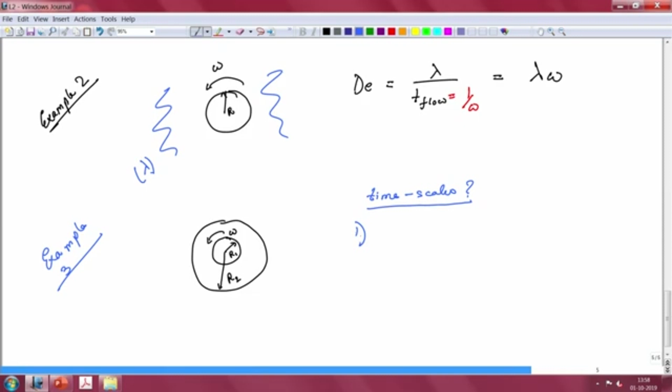At least one time scale you can borrow from the previous problem. So time scale 1 can still be given by 1 by omega. But you can also form another time scale, which is essentially a shear rate or the inverse of a shear rate. This new time scale is another way to define a Deborah number, or in this case, when people use the second one, it essentially becomes a Weissenberg number.

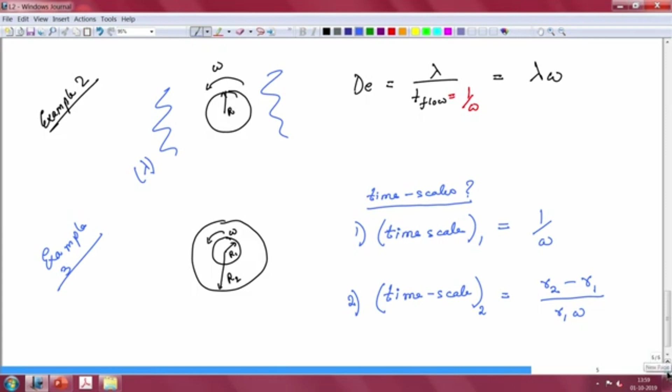With that, we are done with our examples on, or our introduction to, time scales and the Deborah number, which are two very important concepts with regards to soft materials or viscoelasticity.

Now what we will do is go back to the initial discussion from one of the lectures: what is viscoelasticity? We had said that viscoelasticity is the property of materials which involves aspects of two types of common natural responses: classical elasticity and classical fluid, or the classical elastic solid and the classical viscous fluid. This definition was taken from one of the recommended textbooks for this class.

Obviously, the next step before we try to understand viscoelasticity should be to try and understand what a classical elastic solid is and what a classical viscous fluid is. That should be the obvious next step.

Another thing we are going to do here, as discussed in a previous lecture, is follow a continuum approach to understanding viscoelasticity, where we do not necessarily depend upon the molecular constitution of the material. We are going to define macroscopic tests where information on molecular aspects is not necessary. Obviously, if you have that insight, it gives a better understanding of the material response, but even without it, you can still define macroscopic tests to help understand the material.

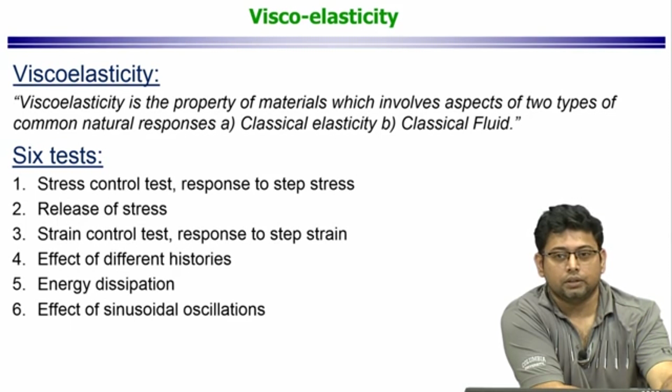When we say effect of different histories, it implies the effect of different histories of one of the imposed variables. Then, energy dissipation in the material, and sixth, the effect of sinusoidal oscillations. These are the 6 tests as per the book Mechanical Response of Polymers by Wineman and Rajagopal. We will start a new page here.

Now we want to discuss macroscopic tests.

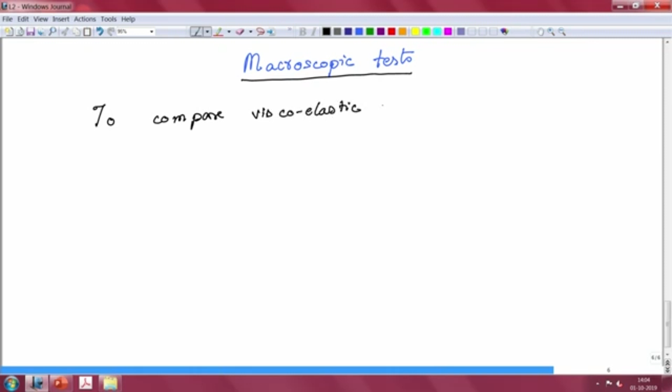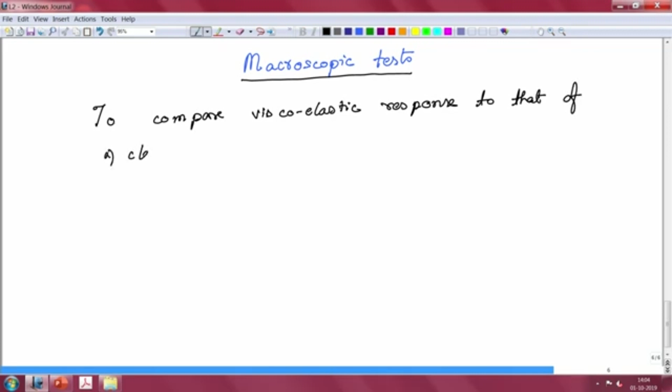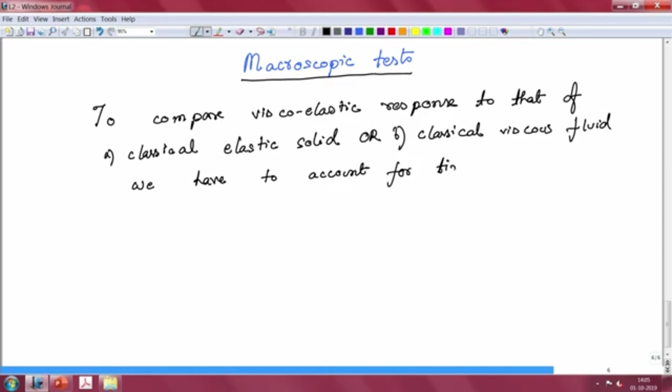But before we get into it, we have understood that to compare the viscoelastic response to that of a classical elastic solid, or B, the classical viscous fluid, we have to account for time as an explicit variable.

So what do we mean by that? We mean that the relationship between stress and strain, when it comes to a classical elastic solid or a classical viscous fluid, typically the constitutive relationship does not account for time explicitly, it is already there, and we will see.

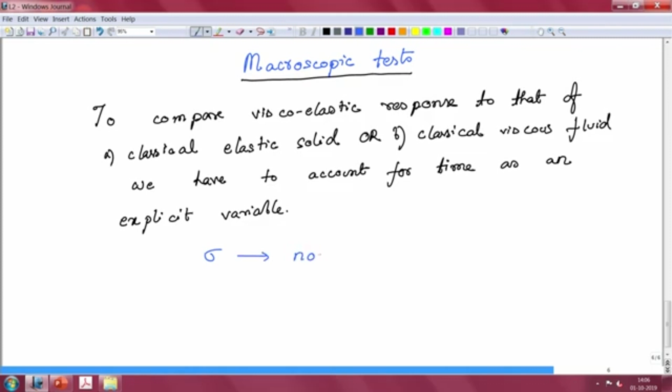So, to get there, let us quickly introduce a couple of variables that we will be using quite a bit. Let us introduce sigma, which we will use for normal or shear stress, and epsilon, which is again going to be a normal or shear strain.

We are going to assume you have some understanding of stress and strain, but I will note that stress and strain are tensors and have to be very rigorously defined in many cases. We are not going to do that right now. We will take a very simple undergraduate understanding of stress and strain, as you might have seen in undergraduate classes.

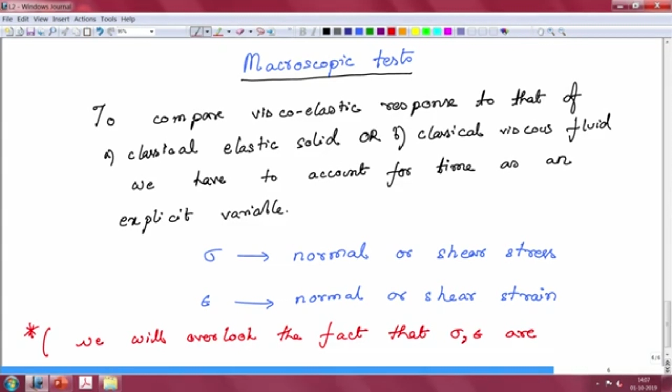So we will overlook the fact that sigma and epsilon are tensors and have to be rigorously defined. We are doing this because we currently do not require tensorial notation so much, and we are just trying to get some initial intuitive understanding. We will treat it almost like a scalar quantity. We will come back in a later lecture and introduce stress and strain as tensors when we discuss constitutive equations more formally.

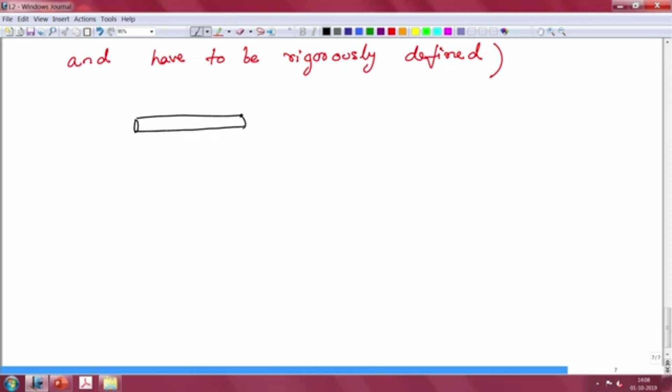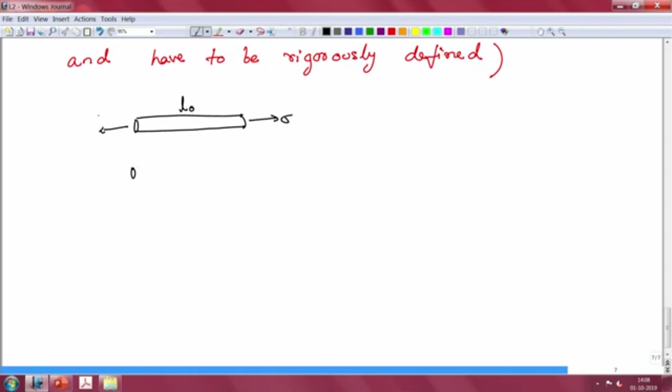Also, what do we mean by strain? Here we go by some early intuitive ideas about what strain is. For example, if you have a rod of length L naught, and you apply a normal stress, the rod increases in length and becomes L naught times 1 plus epsilon as a response. We will stick to this definition, which only works for very small strains. For large strains there are other ways of defining strain, but for most of this course we won't require that, so we confine our attention to this simplistic understanding.

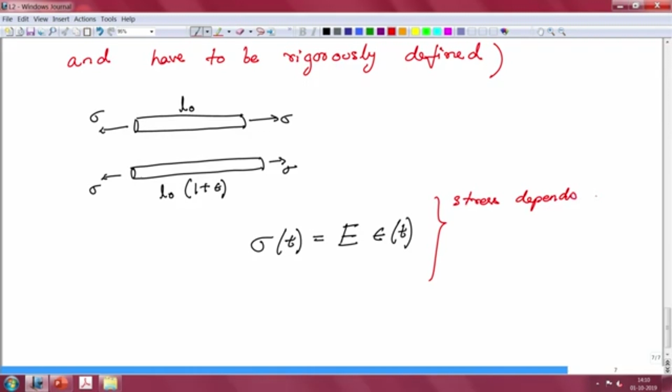Now, I said a few moments ago that we have to account for time explicitly. What do we mean by that? When it comes to a solid material, you're already familiar with a famous rule, where E is a modulus quantity. Here, what we do is relate strain and stress, or vice versa. So we can say that stress depends only on instantaneous strain, and vice versa.

When we write this, we are already assuming that history effects are not important, because the stress at any given point in time depends exactly on the strain at that time, not a value of strain in the past, and vice versa is also true.

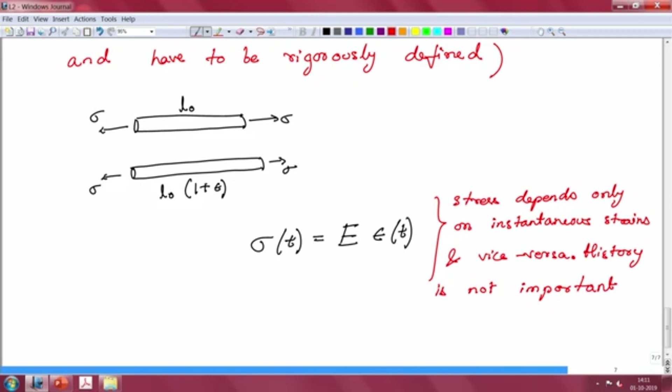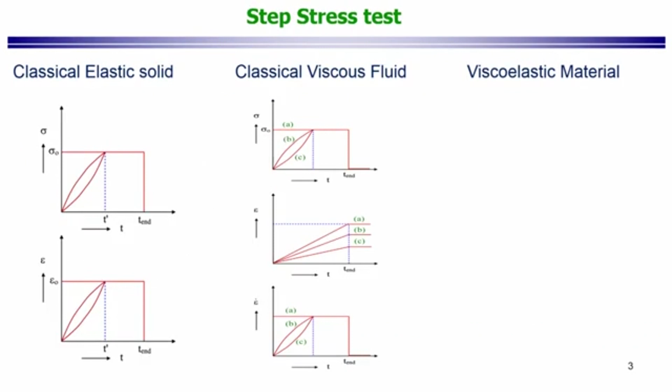Now that we've discussed this, let's move on. We are going to break this idea and start introducing time more explicitly. To do that, let's go back and quickly refer to the 6 tests we had discussed. Let's keep to the first test: the stress control test, or the response to step stress and the release of stress. What do these things mean?

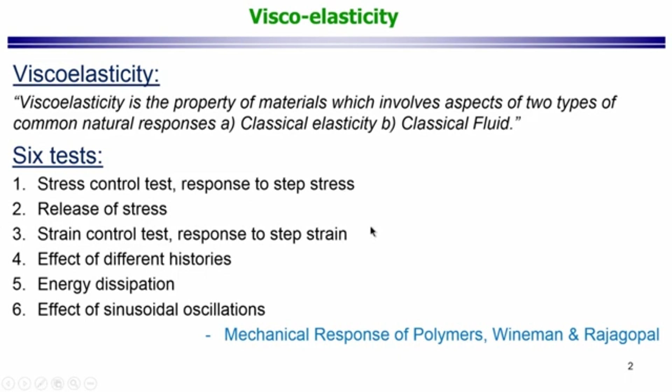Let's discuss the first one, the stress control test, using this image. In this test, we apply a known amount of stress, let's say sigma naught, and measure strain as the material's response. The first diagram is the input, and the second diagram below is the output. This curve is your stress control test—step stress. You provide a known value of stress to the system, and then measure what the output is.

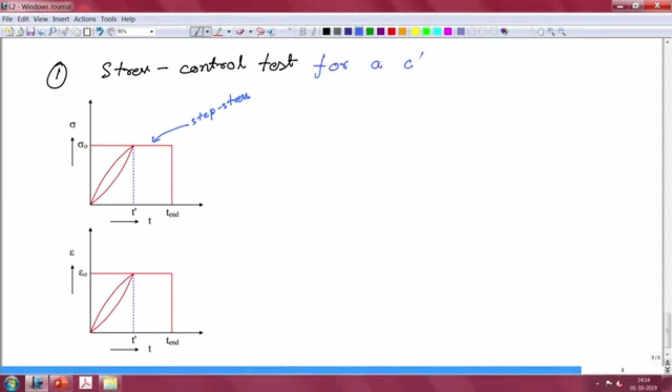What we see for a classical elastic solid - for the next few moments our discussion will be for a classical elastic solid. So, this diagram tells you what happens when you apply a stepped stress to your system.

What you get for a classical elastic solid is that the moment you apply a stress of sigma naught, your system will instantaneously register a strain of epsilon naught, and this strain holds for as long as you keep your stress to that value.

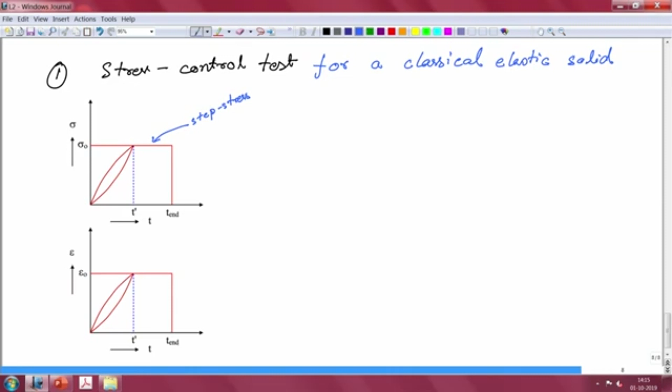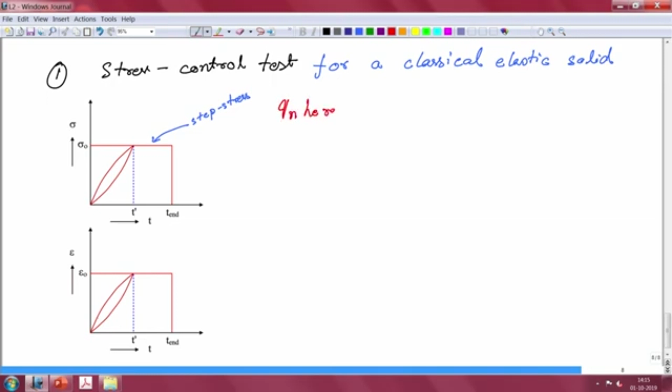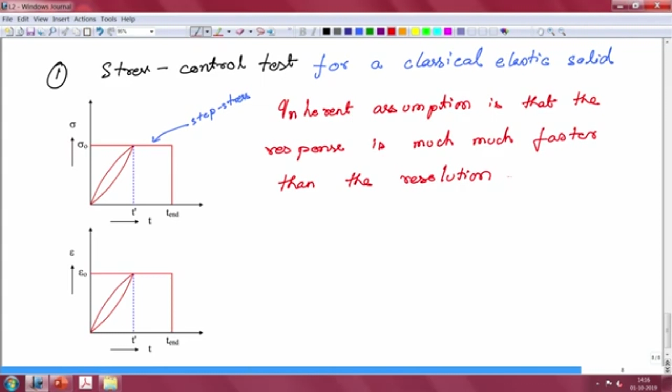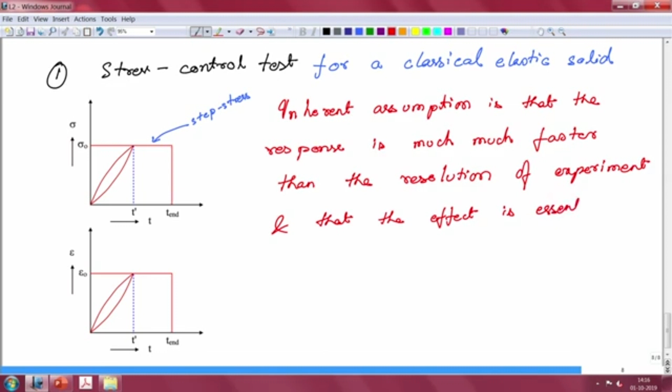So here the inherent assumption is that the response is much faster than the resolution of the experiment, and that the effect is essentially instantaneous.

So here when you apply the stress in the step test, your system immediately registers an epsilon naught, and this immediate response is really immediate in the sense that the experimental resolution is much bigger than the response time. Any material would take some amount of time, but in the case of classical elastic solids, they are so small that a typical experiment would not register them.

What you end up seeing is essentially an instantaneous response. For the time that we discuss continuum mechanics problems, we will treat this response as really instantaneous. When we look at the molecular nature later, we will see why this response is very fast, and get some idea of how fast it really is, because it cannot be infinitely zero - it has to be a finite number. We will come back to that, but for now we will just consider this as instantaneous.

Now, this is the first test, and what it says is it just continues for as long as you keep it - as long as you hold the stress at that value, the strain will also be held at that particular value.

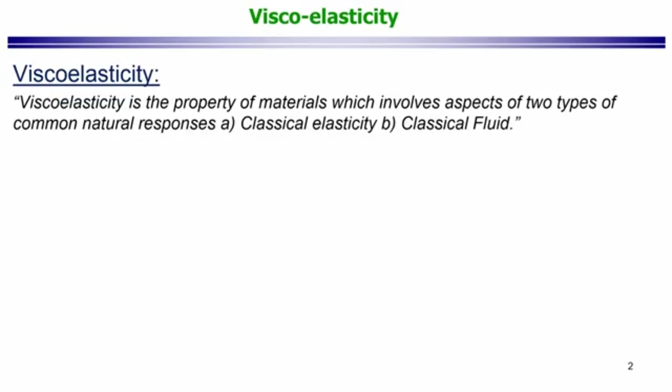The third test was the strain-controlled test. In this test we change the input variable - now this bottom diagram becomes your input, and the strain is now the experimental condition, and you are measuring stress.

So what happens for a classical elastic solid when you flip the experimental control? What do you think happens? It does not change - it remains the same, right. So if you make the experiment strain-controlled as opposed to stress-controlled, the nature of the graphs does not change.

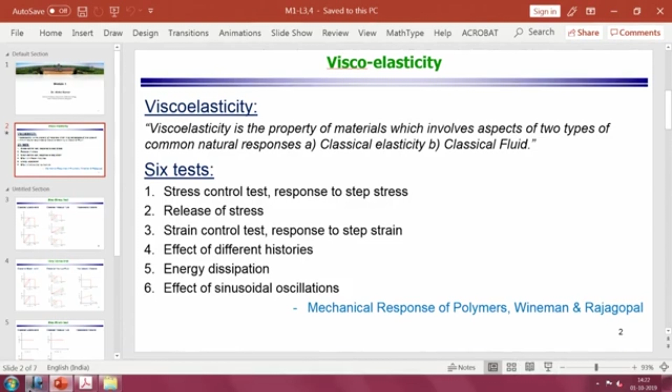In this diagram we have already indicated a few things. This is one path at the top - let us call this path A. This is another path, path B, by which you are reaching sigma naught, and this is another path, path C, by which again you are reaching sigma naught, but its time histories are different in the 3 cases.

So what happens here, the corresponding diagram is already drawn for you, and what you see is that if sigma naught is reached by different time histories, epsilon naught will also be reached by different time histories.

So what you see is, if sigma naught is reached at a certain time, let's call this time t dash.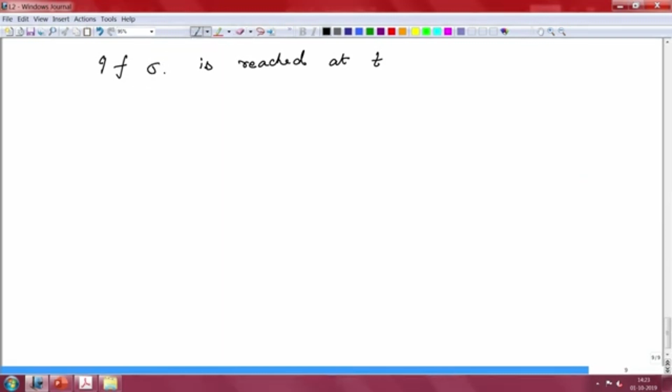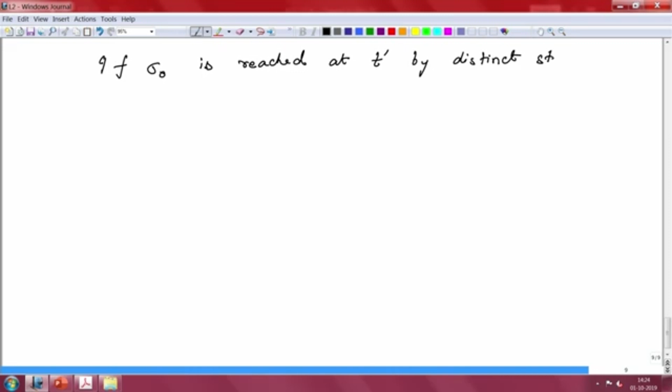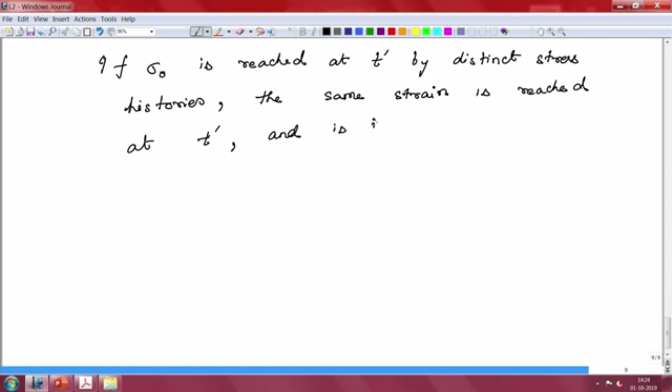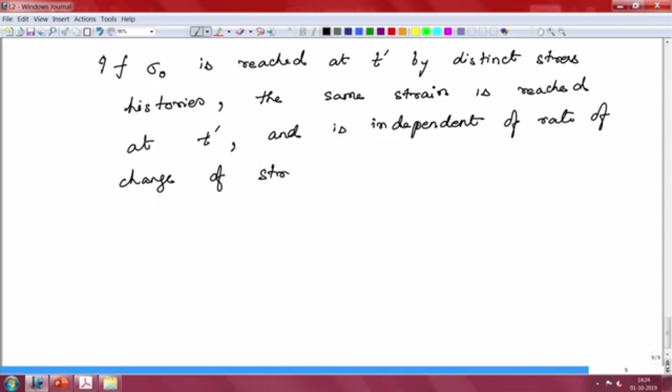If sigma naught is reached at time t dash by distinct stress histories, the same strain is reached at t dash, and is independent of the rate of change of stress or how the value at t dash is reached.

So if you reach sigma naught by distinct stress histories, the same strain epsilon naught is going to be reached at t dash, and it is independent of how fast you are changing your stress to reach that, and it is also independent of how this particular path was taken. This is a very important issue with classical elastic solids, and this is basically what helps you get this result.

So when you are doing an experiment, you are always doing a time history type of experiment, where you are taking one value and changing it with time, or achieving it at a certain time, and recording that time response of the material. But since sigma naught and its corresponding epsilon naught is independent of how you reach that value, this explicit variable t can be dropped.

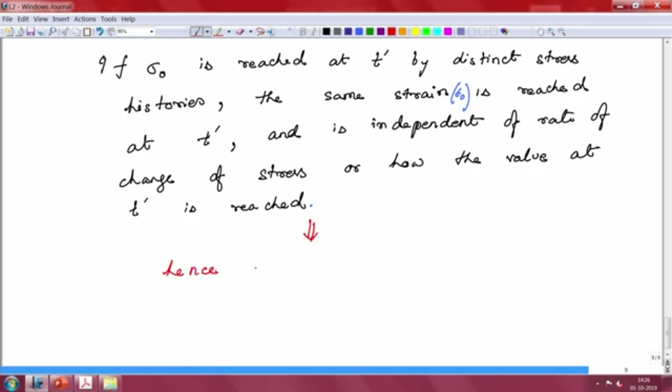So hence this explicit variable t can be dropped.

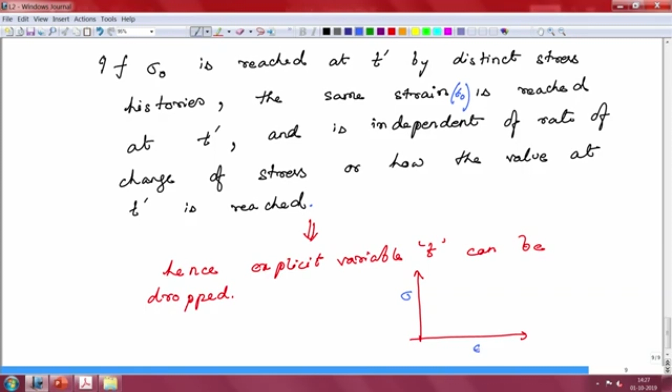And thus, irrespective of who has done the experiments with what history, you will always end up reaching the same conclusion. If many people were doing different experiments with different histories, all of them will still, if they plot sigma versus epsilon, get the familiar straight line curve, where the slope is a function of the material itself.

So the slope gives you the material response. That is why we write this as sigma equal to E epsilon, where E is the modulus. You already know this, but this modulus is a material property.

So, just going back, these different stress histories are basically your fourth type of test. That leaves us with two tests still: energy dissipation and the effect of sinusoidal oscillations.

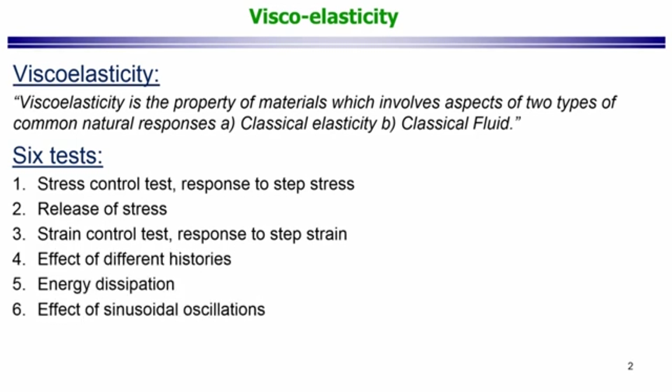With regards to energy dissipation, we have seen that when you apply a known amount of stress, the system registers a certain strain, and this strain holds for as long as you want, infinitely. That is just our simplification. Obviously that cannot be true, but from a theoretical perspective, the idea of a classical elastic solid is that it can hold that amount of strain for an infinite amount of time. And as you release the stress, this strain also comes back.

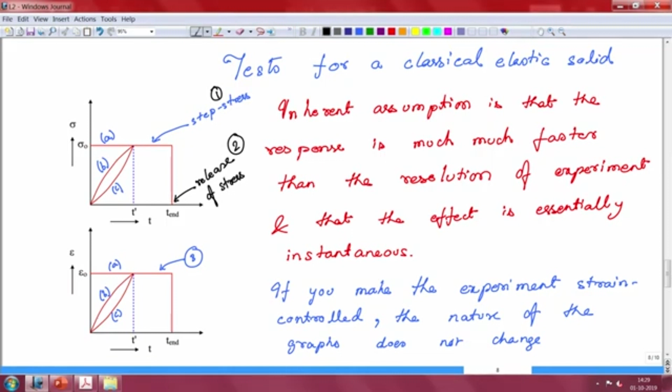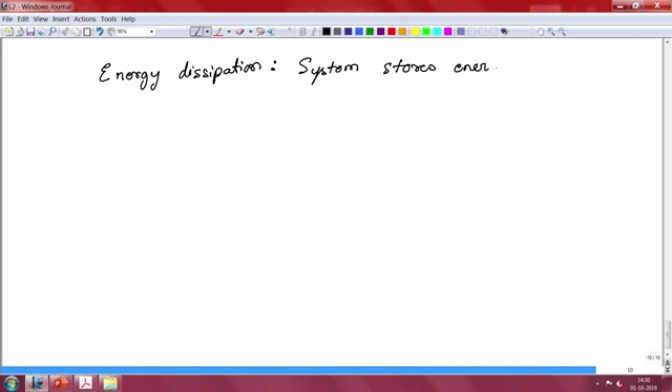So whatever energy that you put in, or the work done, is recovered when you release the stress. The system stores energy for the time that you want, and then the moment you release it, the energy is recoverable. So when it comes to energy dissipation, the system, which in this case is the classical elastic solid, stores the applied energy, and this energy can be recovered fully.

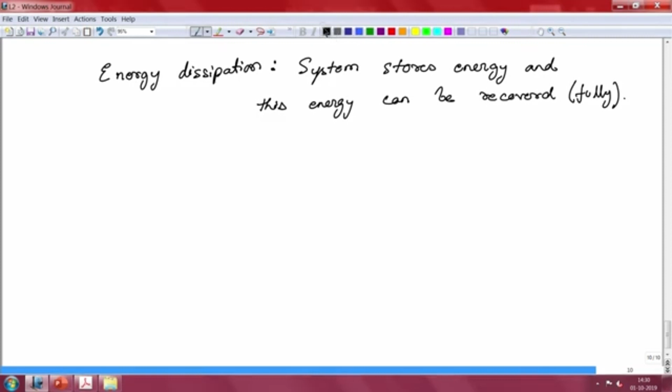So that was the fifth test, and we have the final one, which is the effect of sinusoidal oscillations. In this case, let's say your input is sigma equal to sigma naught sine of omega t. So you are deliberately applying a sinusoidal oscillation, and then measuring the output. We have already seen that stress and strain are proportional, so the output is going to be some epsilon naught, again sine of omega t.

So here please note that there is no phase difference between the two, between the input and the output - they are always in phase, and amplitude does not depend on omega, as you have already determined that sigma equal to E, the modulus, times epsilon.

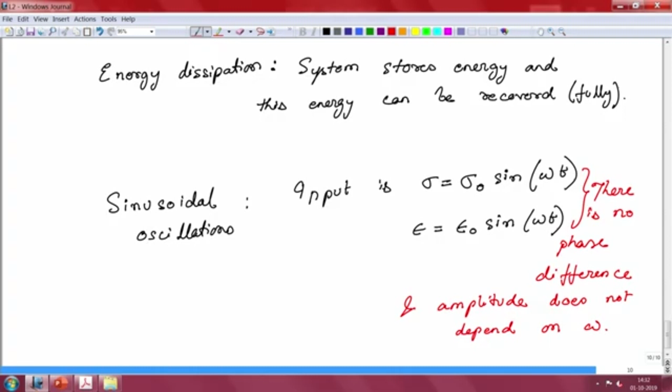So today in our lecture, we started taking a continuum mechanics approach to understanding viscoelasticity, and we have taken the first step in that direction by trying to figure out the requisite tests for us to understand. We found that there are 6 different tests, as suggested in the textbook, and we applied them to a classical elastic solid, seeing what its response would be. In the next class, we will look at a classical viscous fluid.